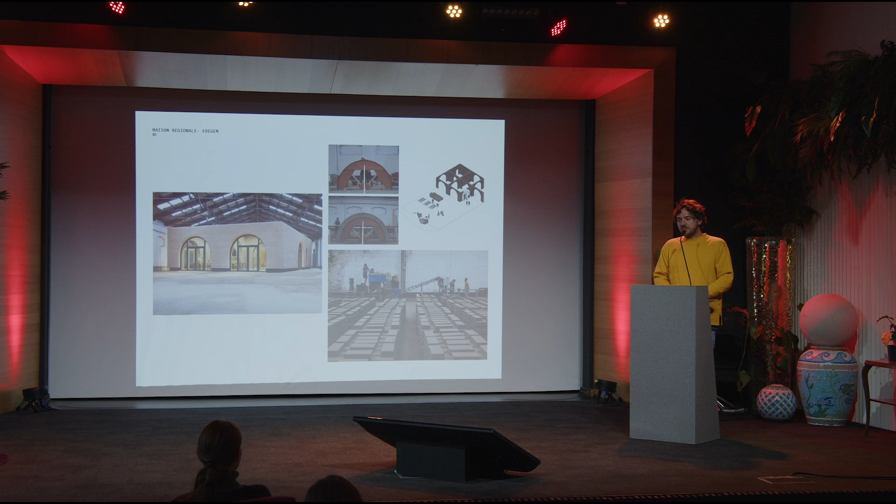And then we had this possibility of going in depth in materials, in developing formulas for reusing excavated earth. But our goal was to make sure this would be a much more common practice. But of course, I could hardly imagine architects using a workshop format to build 2,000 square meters of housing.

And so here came our next step in order to kind of improve and lower the threshold of these materials. Our next project was not in building, but it was a cooperative. A cooperative which would focus on the excavated earth of Brussels, because Brussels has very rich soil in that way. And so starting from a research which was partly funded by the Brussels region, we developed a cooperative which allowed architects to use these materials within a more protected framework, which they could buy, and we built our own production hall in order to produce these materials.

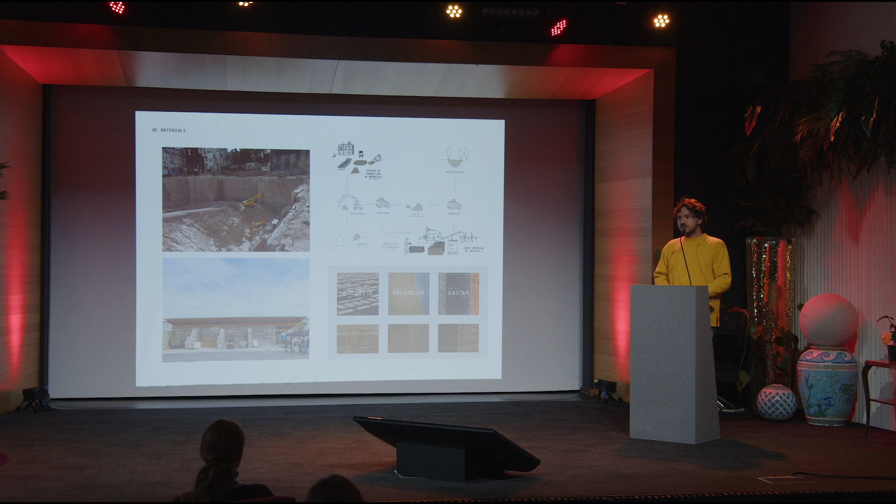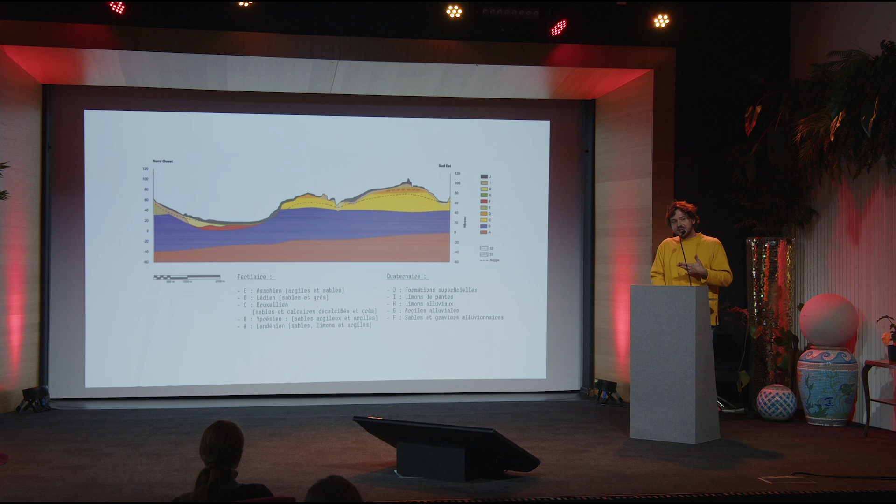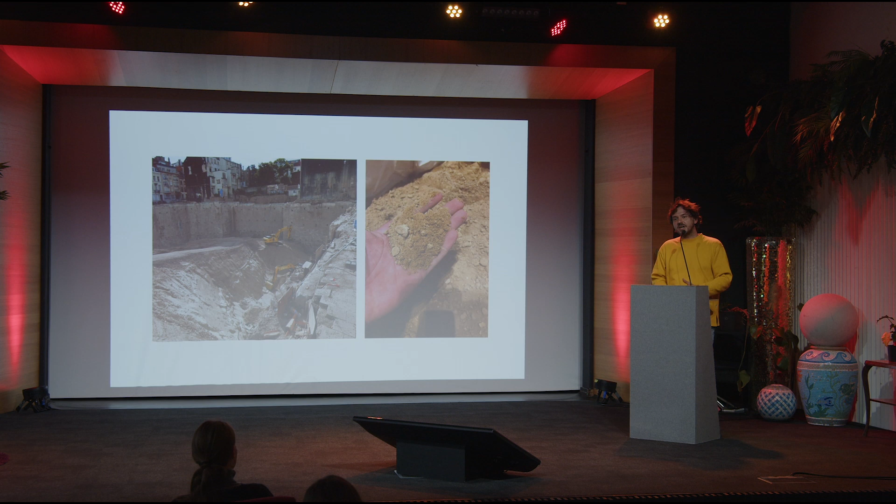And if you look at the section, and this is the section of Brussels, you notice this kind of purple line, which is rich clay soil that you can discover when you go deep down, at 8 meters depth, and you have even the yellow, which is very good kind of sand. You have even a neighborhood in Brussels which is called Sablon, which is referring to the old sand quarry. Sablon means sand in French. But these are actually the quarries we have in the city, and we have clay, we have sand, and we have granulates.

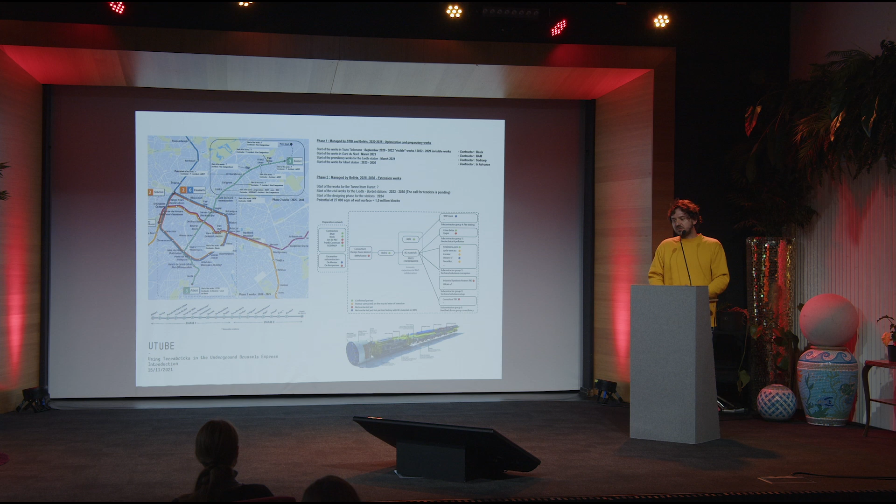And even further, when you look at large-scale construction works, we were able to delve even deeper into the research of these materials, because there was a planned, well, it's still planned, let's see, extension of the metro line in Brussels, which dug quite deep into the crust. And we were able to extend and get funded in order to understand the potential of the earth which was dug out from the construction of these metro lines, and reuse it in the building of the metro stations themselves. And there was a potential, 100% potential of doing this.

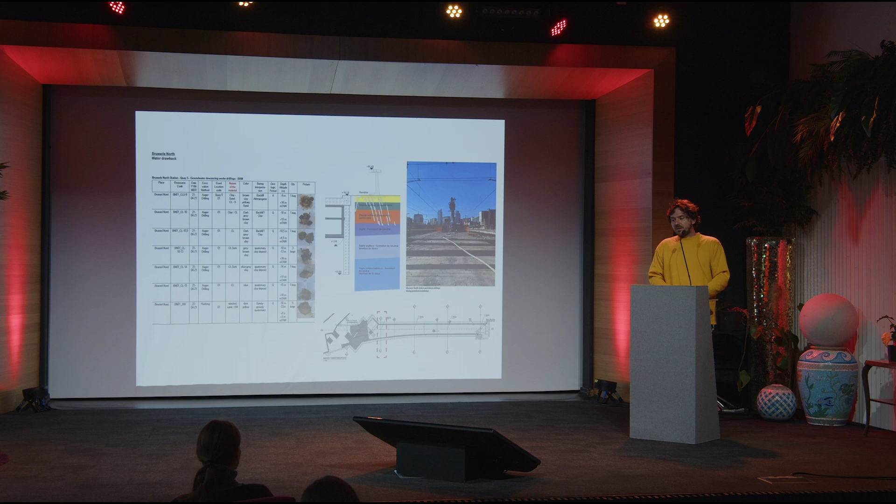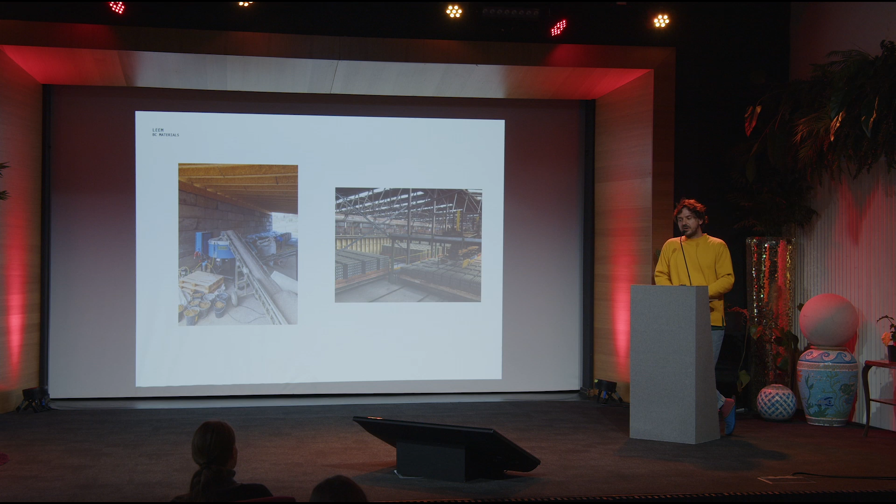But then we come to the next step in the story, or at least in the projects we have, because to the left you can see our production hall, where you can imagine if tons and tons of materials arrive and we have to produce many blocks, it's impossible. And even the blocks that we were selling are quite pricey. We are not within the logic of an industry, we're in the logic of a factory, something in between. So next step in the idea of how to improve this material, this excavated earth, but earth in general, as a kind of democratized material for the many, and not just for large-scale buildings, but for everybody in general.

We started to look into the potential of collaborating with existing industries, because if you want to produce more to lower the cost, there's an enormous capital you have to invest, but the machinery to do so already exists. And so this allowed us today, with a collaboration with the concrete industry, which has machines to compress concrete blocks for the streets, or even with other companies of fired bricks, to use their machinery, hack it, and allow it to produce unfired earth blocks and earth mixes.

And therefore today we have a kind of catalog of earth materials based on the excavated sand and excavated clays of the region of Brussels. And it allows you to open an enormous range of materials, going from paints to mortars to blocks. And the next step is in developing the legal framework around these materials, because still today there are few, there are coming more, but it's still a large work that we envision to do.

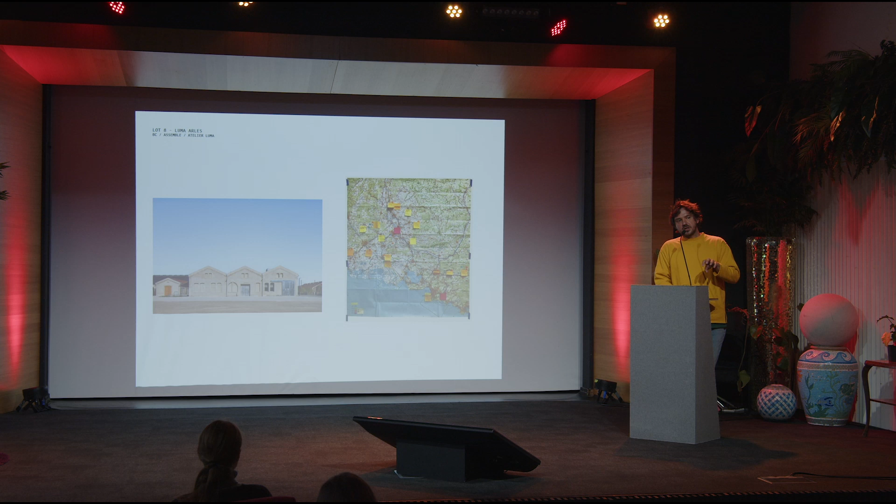The client is the Luma Foundation, quite a financially strong art foundation, and it has a chapter within its foundation called Atelier Luma, which focuses on the development of materials from its region, more specifically the Camargue region. Entering this project, during which we collaborated with Assemble, we used the same kind of methodology, in which we try to understand firstly the region, the materials, the resources, the people that are acting within the bioregion. There's an image not relevant in this case. This is the building in its initial state.

And Atelier Luma already had quite a past of researching agricultural waste or agricultural practices in the wetland. One of them was the sunflowers, in which the stems were left and were a waste from agriculture. So they had this work identifying potentials of the region. Salt, we have a lot of salt production in the Camargue, which they then used to develop tiles. Algae, which contains alginate, which is quite interesting as a replacement of clay, for example, for certain plasters, as it functions as a binder, such as cellulose of plants functions. But all this at the level of design.

When we entered, we introduced other materials which came from our expertise, such as stone dust. When we visited limestone quarries in the region, there was a lot of stone dust which was not valorized in their supply chain. Sand quarries, where water was used to sieve the earth dug up in order to get just high-quality sand. Clay was still very present in this water residue. And the building itself, of course. In the renovations, there were parts that we had to demolish or take away, such as the tiles. And these were always sources of material, sources of construction.

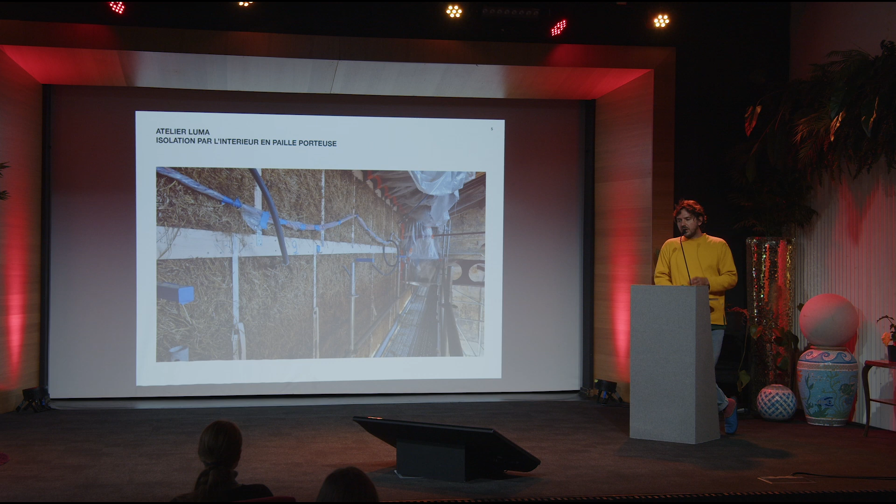And so after this project, this is the space afterwards. So as I mentioned, this project is really a showcase. And personally, the whole team is very happy to see that the contractors we worked with and the farmers who gave the rice straw bales organized themselves in order to promote the use of rice straw bale in the region, and set up a kind of organization around the riziculture, which would be the rice culture. And we did a project together with them.

I took the presentation of the contractors, so there's quite a lot of attention to the project. I saw their presentation, and I thought I have to use that, because it really shows the importance of contractors and their world and communicating what is happening. Of course, we're all communicating this between architects, and I hope in the future we will use these methodologies. But if you don't have the contractors next to you, who are willing to apply, who are aware of these changes, who are willing to take the risk or understand which type of risk they're taking, we're stuck.

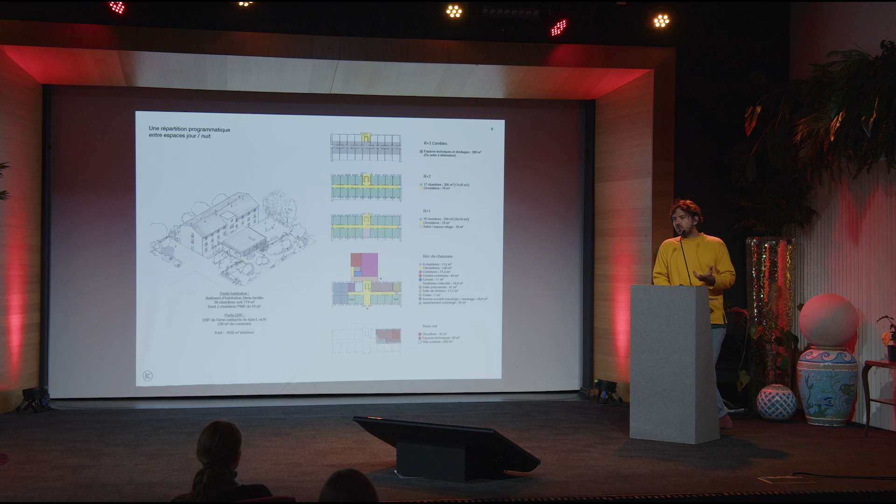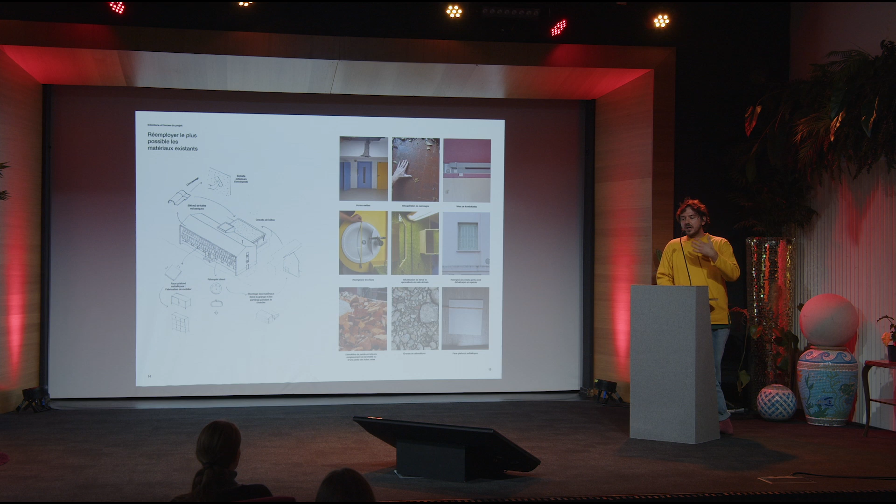And so this project, which I go through shortly because I see the time ticking. This is the renovation, and this is not linked anymore to the rich Luma Foundation. This is a project for the city of Arles. It's the renovation of an old clinic into student housing. There's the ambition of keeping the whole clinic as such with its structure, and the ambition of utilizing as much as possible of the existing stock of sinks and debris and light installations and so on. Even of the exteriors, we're able to reintroduce elements from pathways from the city into the building.

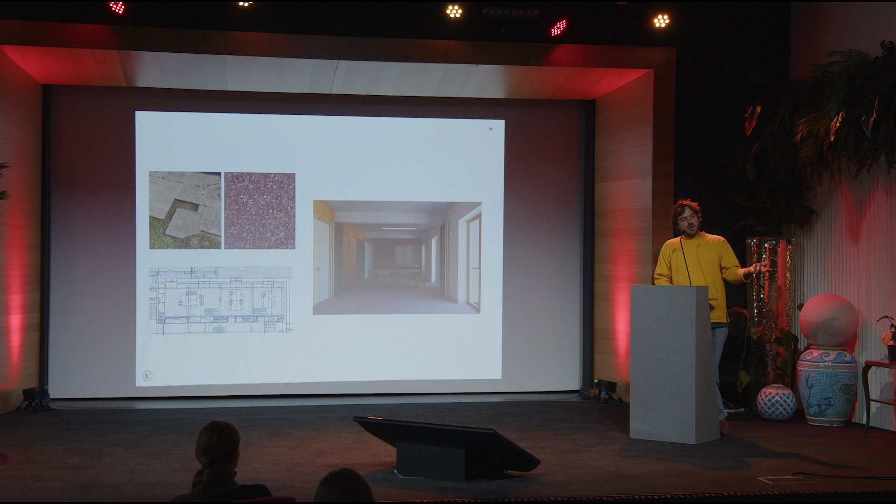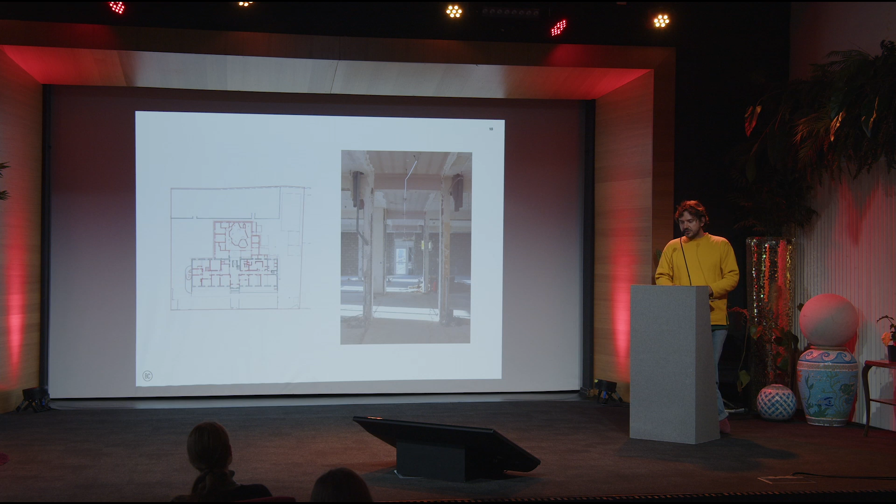But yeah, before I enter the other part, so we have this stock of components that we're able to reuse. Next to that, there's a kind of maximization of the use of the existing structure. There's an extension at the back. There was the old chirurgical kind of space where they did, not the examination, but the cutting. So these spaces were at the back, but of course they were almost completely out of plastic because they were cleaned each day. But we kept the footprint with an extension with the refectory and kitchens.

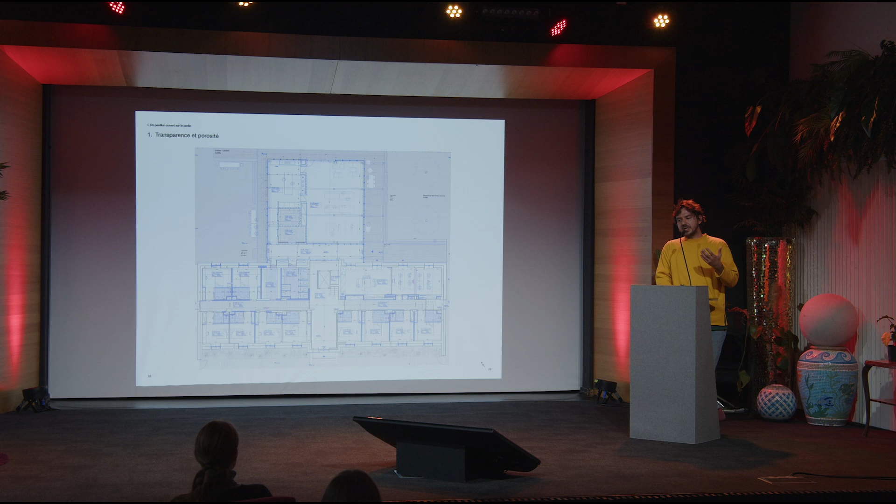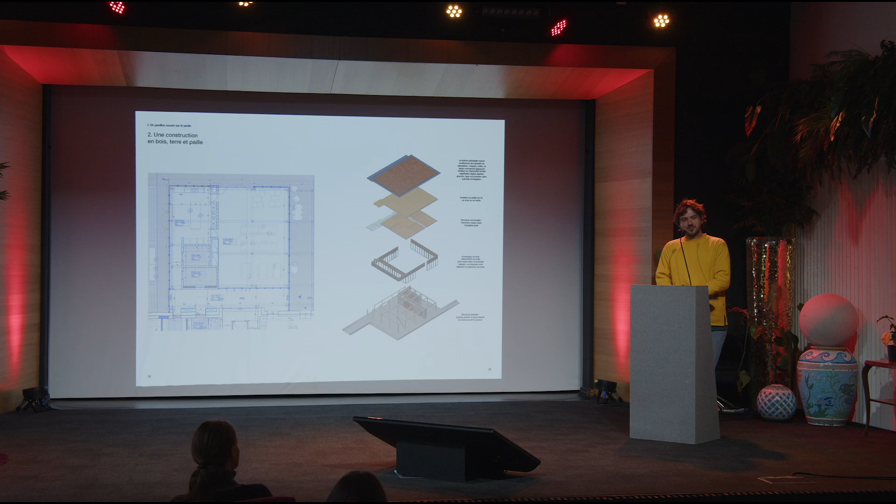This complete extension is in wood and earth. We had an overproduction of the blocks for the Lot 8 project, so we managed to buy them very cheap from the Luma Foundation. And next to that, we focused on local wood, which for us was important after having done Lot 8 and having been kind of cut in our heart by having to use wood that came from much further than the region itself.

We really focused on that, and I was surprised how much it took actually just for 20 beams and columns, using cypress, which is growing in the region, and cedar. It was quite a lot of energy involved in convincing, not really the client, but the contractors and the sawmill to use these structures and also use them in a wood-on-wood kind of connection. And there comes the whole skin.

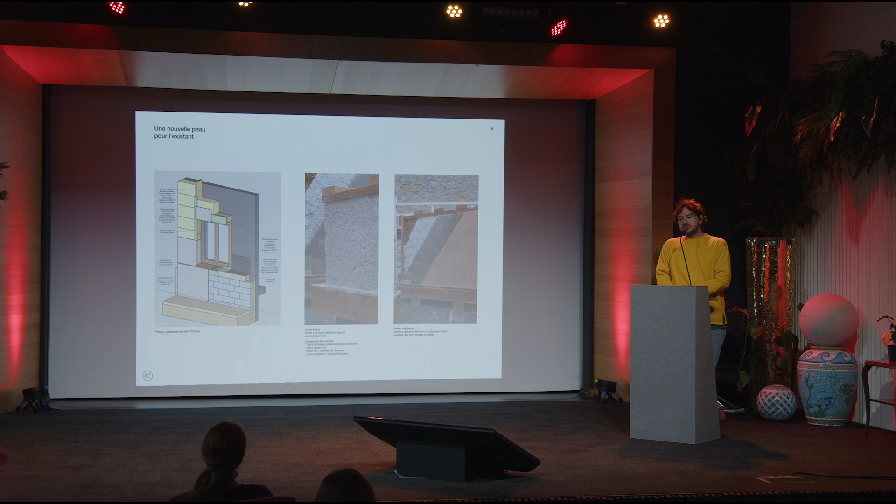So of course, we all are aware of straw bales having 35, 36 centimeters. So if you imagine the existing structure of the hospital, which was already quite small, it was impossible to insulate from the inside. So together with the contractors, we decided to really insulate the whole building from the exterior. In France, there's a very well documented book on insulating with straw bale. So as such, it's nothing new, but it has never really been done at this level or at this scale. And for the Paoli project, we had to insulate in total, I think, with 30 tons of rice straw.

And when you look at the region, which is unvalorized, we have a whole amount of straw being produced in the region in Valensole, 540, of which a lot of blé. But if you look at the Camargue, there's 27,000 tons of undervalorized rice straw, which actually means a thousand of these projects for the region a year, which is enormous. And we all know, of course, the characteristics of straw bale, and they're the same with rice straw bales. But again, they have this enormous thickness. So the whole exterior was insulated.

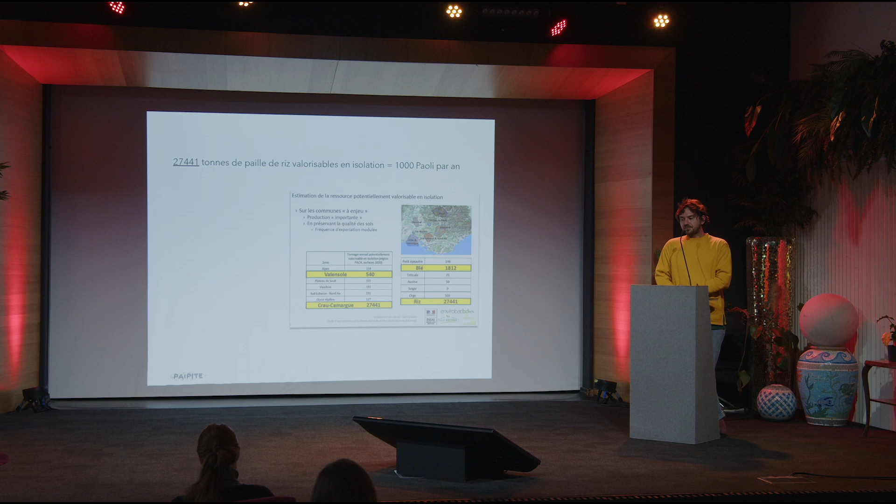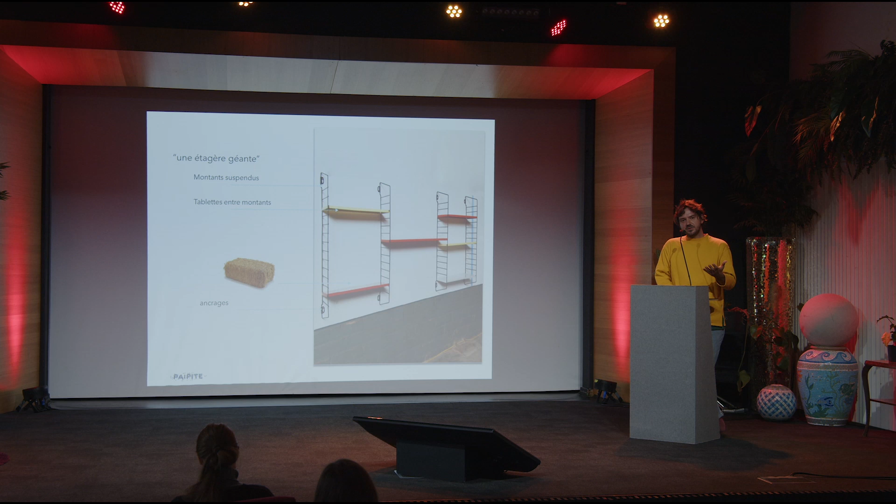And so when we go a bit further, I love this image of how the contractor explained how they work in the construction of self-load-bearing rice straw, which is basically you minimize the vertical wooden elements, you create a shelving technique, and you have ring beams compressing the straw bales and dividing the load accordingly. So like that, we minimized approximately 60%.

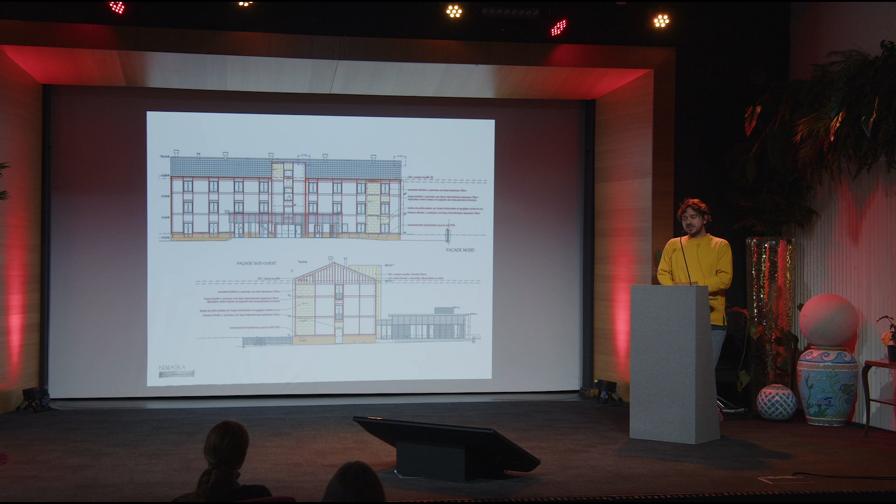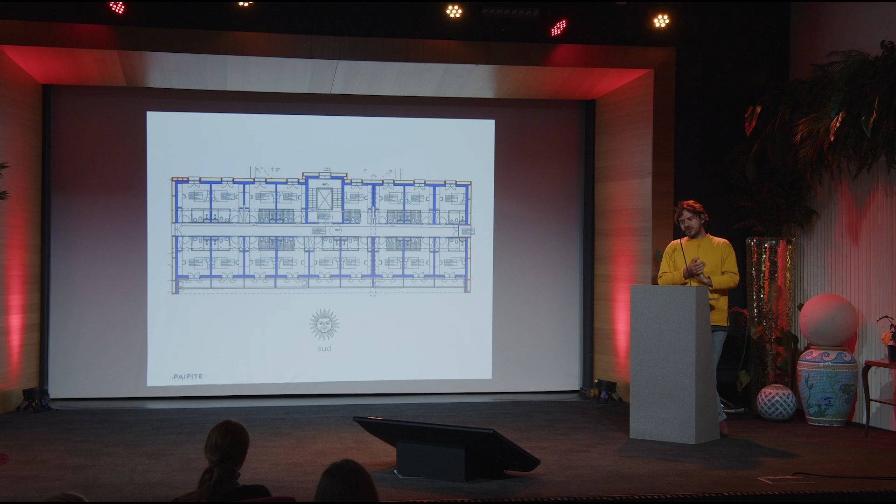Another interesting element here, these are things that we had to do in order to see if the straw bales could be slightly attached to the concrete wall. These are all tools that exist, but not in this way. These are the straps that are used for the construction. Maybe this goes slightly more technical. I think what I more want to show you is another part of this building, which is the backside. So another issue insulating with these 35 centimeter thick rice straw bales is, of course, the loss of space.

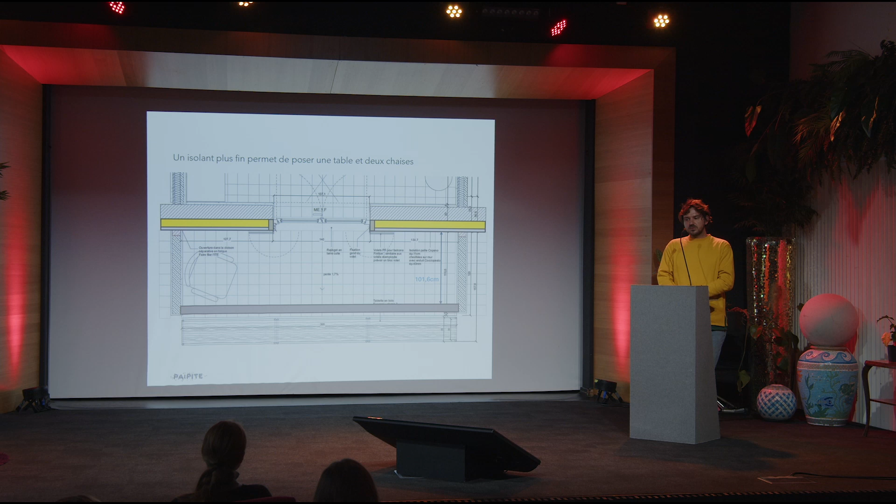And so, for example, for the terracing, it was impossible. But we were surprised to see that there's development also in the world of contractors and producers of materials. So I think it is very clear how a company like Copano, which is there since 3 years, developed actually a tool, a machine. So there's also an understanding of the lack of certain types of machines to produce ready-made materials for construction from locally sourced materials.

This is actually basically a huge, I think 3-meter wide, sewing machine in which the rice straw is put through, and it actually stitches the whole thing, and then you can easily cut. And it's a game changer for the construction industry. It's these types of companies. I'm a big fan of Copano because it's this type of company

which is wishing to go a step further, that has received subventions, of course, from the French state in order to research and come up with ways of using these materials in the construction sector. And so it's similar to what BC Materials was trying to do, to lower the threshold for architects, constructors, entrepreneurs to use these materials, to put them much more in front of the existing lobby that we had in the past years of concrete and so on.

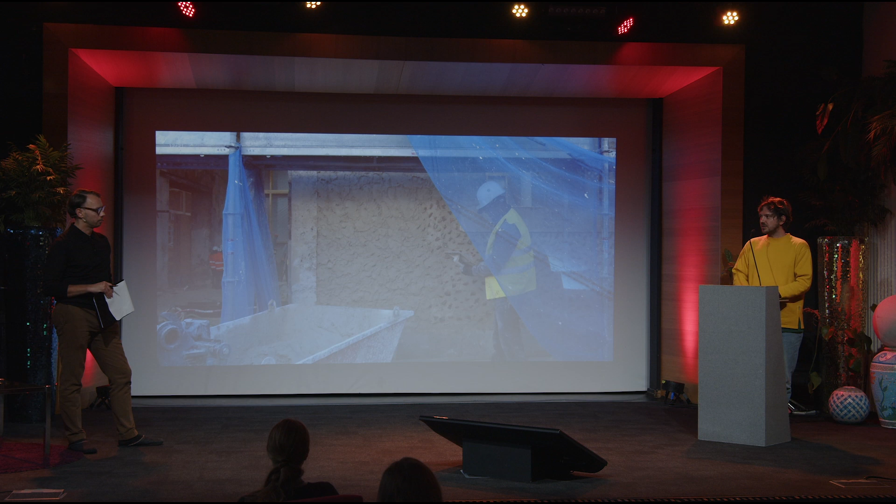Because I think Future Build explained as well the importance of storage spaces in a city to allow circular construction. And so, yeah, this kind of synergy with many more actors of the circular economy in Brussels, being together, having a place to share these kinds of experiences and so on. So cool. Internal scaling up.

We have a hand there. Jane. Mm-hmm. Hello.

I'm working for the city, and I notice how for us, when we're dealing with demolition, especially in Estonia, it's considered some kind of simple thing to do, and often people don't realize how big this process actually is, and the impact of it. But I also feel like it's often an easy solution to get rid of a building, because if something goes wrong, it's an easier way to get out.